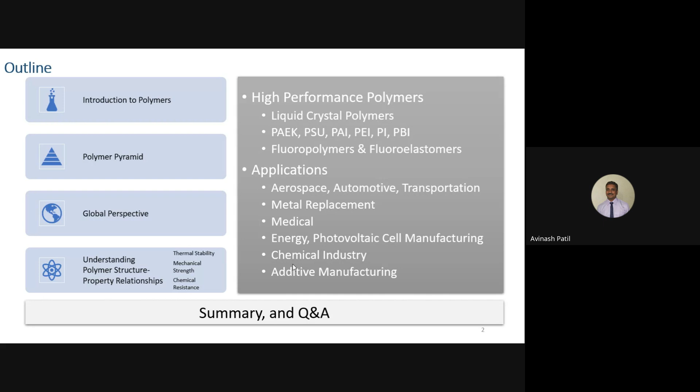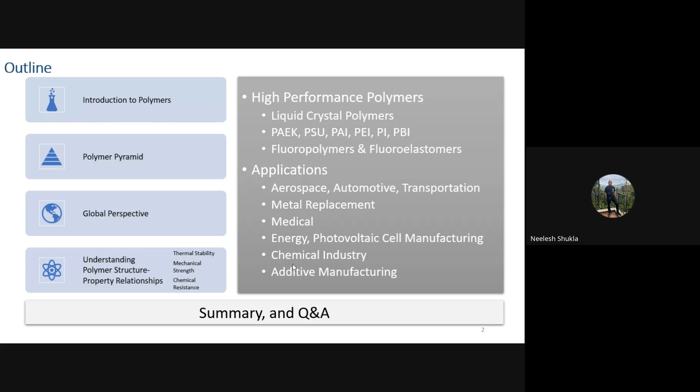I don't think anyone is there who has not heard the word polymer. Obviously, the kind of developments that have taken place in the field of polymers, or what we generally call plastics, make it impossible to live our lives without plastics. So we are all aware of that. We come across many polymers from morning to night, and we'll try to identify what high performance polymers are also there, which might not be very evident to us, but we do use them directly or indirectly. That's what we'll try to see throughout this presentation.

Coming to introducing polymers very briefly: the word polymer comes from the Greek words poly and meros, a combination of these two. Poly means many and meros means parts. That's how the word polymer has been made. It's also known as macromolecules, because these polymer molecules are very different from the regular chemicals or small molecules - these are much longer molecules.

Now, how are polymers made? In order to make a polymer you need something known as a monomer. A monomer is a smaller molecule, and a polymer is a much longer chain of these monomers linked together. So this is a polymer, and here you have got a monomer.

Now, one polymer that we all have used widely and seen everywhere is used to make polythene bags, the shampoo bottles we use in the bathroom, the toys with which our kids play, and even some of the safety equipment worn by people in the army in very dangerous situations. This polymer is polyethylene. It's one of the simplest polymers to start with - you start with a monomer named ethylene or ethene, and you polymerize it. Polymerization means joining together these small molecules in a chain, the way you'll make a garland using small flowers. That's the way polymerization is done.

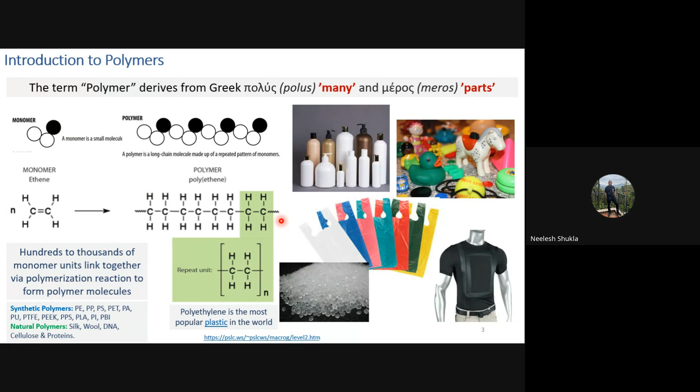So you can broadly categorize polymers as synthetic polymers or natural polymers based on the kind of origin they have, the roots they are made from. There are many more other ways also, but we'll just stick to this for the time being.

Now, I understand there's a different level of familiarity with polymers, so I've tried to capture some resources which would be useful even after today's session. Try to grasp what you can grasp today. But if you are a beginner and haven't gotten too much into polymers or chemistry so far, I would request you to visit the Macro Galleria site - its link is also provided below. This is a very fun way to learn about polymers, and they also have a separate section called Kids Macro Galleria, so even kids or people in school can try to learn about polymers in a fun way. So this is for beginners and those who are advanced learners.

A few books which I have found very interesting and informative throughout my career are listed here. One of the best books I came across was The Principles of Polymer Chemistry, by the 1974 Nobel Prize winner Dr. Paul J. Flory. Apart from that, there is one more about Principles of Polymerization by George Odian, and another one by Billmeyer, a textbook of polymer science. These are highly recommended books for anyone who wants to learn more about polymers.

With that bit of information, I would like to now introduce you to high performance polymers. Polymers have different properties, different characteristics, and the way they've been used in general, the kind of volumes and properties they have, has been used to categorize them. We talked about one categorization, natural and synthetic, based on the origin of the molecules. This other categorization is based on their performance, where you break polymers into 3 or 4 levels. Generally, earlier these used to be called commodity plastics, which are very basic polymers we use day to day: polyethylene, polypropylene, PVC, polystyrene. These are the materials.

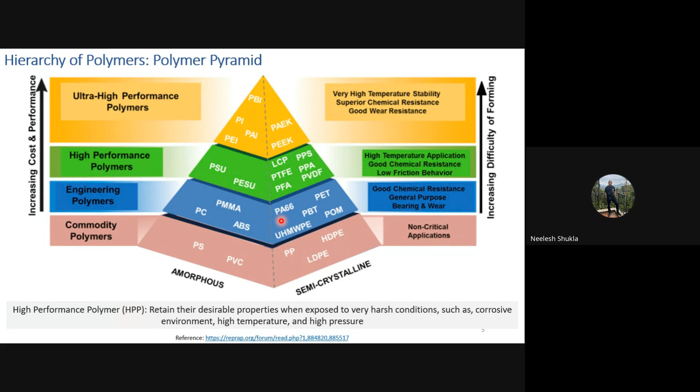Additionally, it's all about scale—the scale, as I mentioned, is less than 1% of the total, and that also pushes their cost up. So they are generally costlier compared to other materials. Roughly, to give you a ballpark number for the price, they would cost somewhere from $10 to $100 per kg. That's the economic part of the high performance polymers.

Now there are many manufacturers across the globe who make different kinds of high performance polymers—Saint Gobain, Solvay, Victrex, DuPont, Daikin, Sabic, BASF, even 3M, Celanese. These are some of the key manufacturers. The list is not limited to this; there are many more, but for your reference, some of them I have listed here.

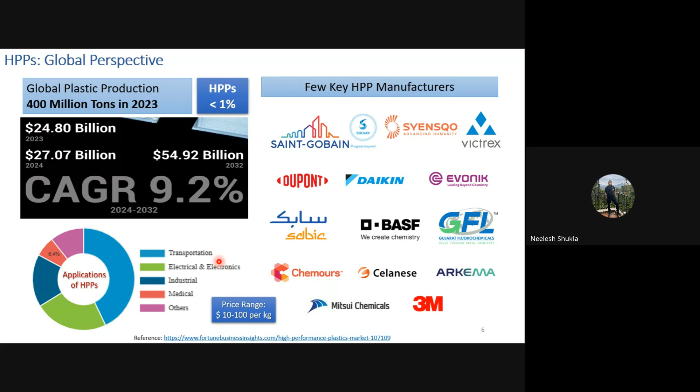Now, when you talk about high performance polymers, these are a few examples. For example, PEEK, which has very good strength and thermal stability, and these properties make it suitable for applications where you need strong mechanical properties and high temperatures.

Now, PSU, polysulfones, have got very good electrical insulation, very good mechanical strength, and they are very good in terms of their dimensional stability also. So for these properties, they go in the electronic industry.

Polyphenylene sulfide, PPS, this polymer has got very good purity and very good chemical resistance. Obviously, mechanical strength is also very high. So these characteristics make it very suitable for medical applications, and also electronic and automotive industry.

Another polymer, polyphenylene sulfone, which has very good impact strength and chemical resistance. So this polymer, based on this structure, can withstand steam sterilization, and that makes it a very suitable material for medical application.

We have polyetherimide, again having very good strength and good electrical insulation, and additionally good radiation and chemical resistance. So these things make it very suitable for electronic and aerospace applications.

We have a couple of fluoropolymers, PTFE and PVDF, and these polymers are very good. They will have very good chemical resistance. They will not have very high mechanical strength, but their chemical resistance is something that makes them very useful, and that's where they are widely used in the chemical industry.

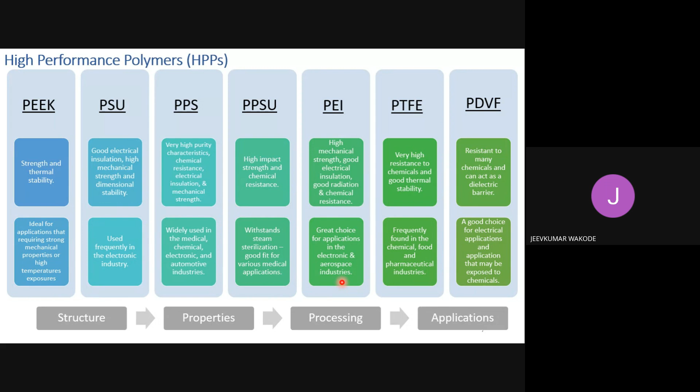So as you can see on this slide, I have put many polymers, their properties and their application. There's a link between the polymer and their properties. So the properties of any polymer would depend on what kind of chemical structure it has. That would be the basic chemical structure, what kind of chemical constituents are there, the monomers or the repeat units that the polymer has, which would determine to a large extent the properties of that particular polymer.

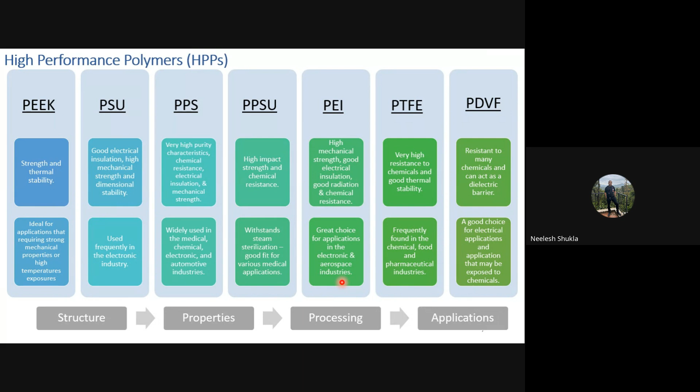And then subsequently, processing is required to convert this polymer from raw material to a shaped product form, and that would determine the application. So in order to be able to identify a suitable right material for any particular application, one needs to understand the relationship between the polymer structure and its properties. So that's what we'll do. We'll take a few cases here and try to understand that aspect before we move further.

As I mentioned in an earlier slide, these four aspects, the structure of the polymer, the properties of the polymer, their performance, and their processing are related. So you have to have all these, and one aspect that is missing is cost, the economics of the whole thing. These four, plus one factor, when they all come together and are coordinated, then you have a proper material converted from the raw material to a final product, which can be useful for society.

Now, if you talk about structure, as most of you should be aware about polymers, they are long chain molecules, but those long chains can be in very different ways. They can be linear, they can be branched, or they can be cross-linked. These chains can be very flexible, or they could be very rigid.

As I showed you one example, we had polyethylene coming from one monomer, ethylene. You can use more than one monomer and end up with copolymers, where you have used more than one monomer and they have copolymerized. Or you could use polymers in combination, which is also a property. You have polymer A with certain property, polymer B with certain property, you mix them in a suitable ratio, and you get a third material which has the properties of both. That's called polymer blending.

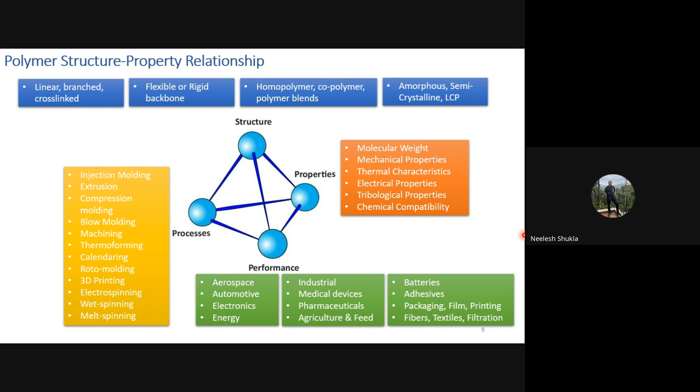So these are the performance characteristics which demand the selection of the right polymer. So this is the one aspect that is very critical, and let's look at a few examples of how the structure is going to affect the polymer property. So there's some phenomena, as you know, if you take water and cool it down, it will convert into ice, the solid phase. If you heat it further from room temperature to higher temperature, it will evaporate. So those are the thermal transitions that water undergoes as you change the temperature.

So polymers also undergo this kind of transitions, but polymers are more complicated than low molecular weight molecules such as water. So as I mentioned, the polymers have got very long chains, and these long chains can be present in various kinds of arrangements.

So if the polymer chains, which are very long, are arranged such that they fold onto each other and are neatly arranged in this packed form, they are known as crystalline. The polymer would be known as crystalline. On the other hand, if you have these chains going everywhere, randomly going in and out, you would have something known as amorphous.

But most of the polymers generally fall in the category of semi-crystalline. There are not many polymers, or very few, you can call them completely crystalline. Otherwise, most of them come as semi-crystalline, and there are elastomers and thermosets which would be called amorphous. So these two characteristics are there.

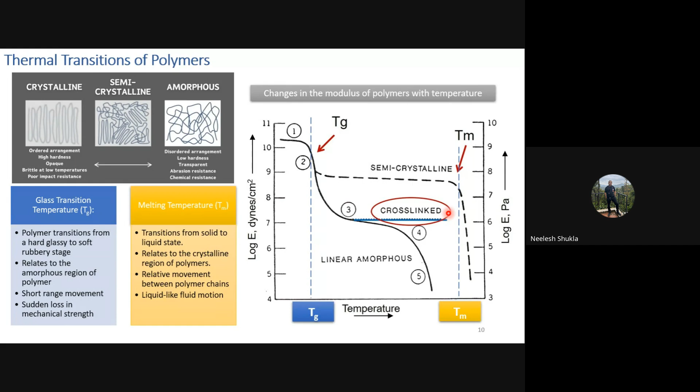As we saw, the properties depend on the temperature of the polymer, and there are transitions as you go from low temperature to high temperature, so they affect the performance of any polymer. You can look at this curve.

At what temperature this kind of degradation takes place depends on their structure again. Generally, polymers with a higher degree of crystallinity will degrade at a higher temperature.

Polymers whose repeat units have aromatic groups and halogens will again have better thermal stability. Obviously, polymers with cross-linking or secondary bonds like hydrogen bonding or van der Waals forces will also be more stable compared to other polymers. So these factors push the thermal stability of polymers to a higher level.

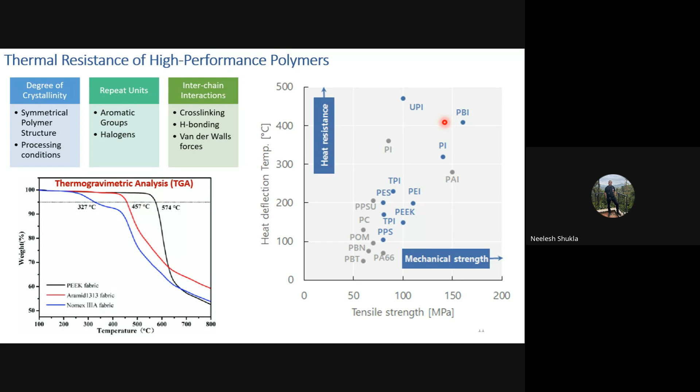On the graph on the right side, I've compared the mechanical strength and the heat deflection temperature. You can see all the polymers, based on their structure, will have very different strengths. High performance polymers like PBI and PI would have higher tensile strength and even higher heat deflection temperature, so they can be used at higher temperatures, because other polymers would lose their strength at those temperatures.

Talking further about the mechanical strength of polymers, it depends on one very critical factor, as I mentioned earlier: the molecular weight of the polymer. As you start taking small molecules and joining them together via polymerization into a longer chain, there's a certain threshold limit up to which the polymer would not have any useful mechanical strength. After you've linked a certain number of polymer chains, which varies from polymer to polymer, the material would start showing some tensile strength that can be of use.

But while the tensile strength is increasing, there's one more phenomenon also taking place: the melt viscosity of the polymer also keeps increasing with the increase in molecular weight or chain length. So the downside is, if you want very high performing, high strength polymers, you can keep adding more polymer chains, but your viscosity would increase, which has a counter effect in terms of processing — you would have to reach higher and higher temperatures.

Then there are some polymers where, although they are not thermosetting, their large molecular weight makes it very difficult for them to be melted and processed. One such polymer is ultra high molecular weight polyethylene. It's the brother-sister of polyethylene, the simplest polymer, but the number of polymer chains is many more compared to normal polyethylene, HDPE or LDPE.

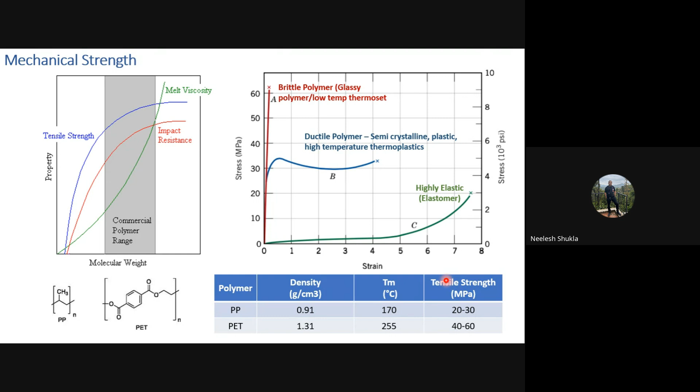If you look at the density of polypropylene, it is lower than that of PET. Its melting temperature is also lower, and its tensile properties are also lower. So that's what I've been trying to tell you - the way you play with the structure of a polymer affects its mechanical properties.

Now coming to another critical aspect that relates to the chemical resistance of polymers - their structure. When you want to use a polymer in contact with any environment where chemicals are present, there are certain factors which would affect its stability, whether it can be the right material or not, or whether it will work there or not. First of all, the polymer structure, as I mentioned earlier, and the type of chemical that you're going to use.

The concentration of chemical - whether you're using concentrated acids or alkaline material, or they are in low concentration - temperature: low, high, or sub-zero. How long the chemical is going to be in contact with the material, and during the application, whether there will be stresses on the material, because that will be additional burden on the polymer. These are the factors which would affect the performance of any polymer under the environment.

Now, generally, if you look at different kinds of high performance polymers, fluorinated materials which have got a carbon-fluorine bond - PTFE or Teflon, which we all know, is one such material. This carbon-fluorine bond is the strongest bond in organic chemistry. Additionally, fluorine is very highly electronegative, and as a result of these effects, the fluorine atoms which are around the carbon chain backbone kind of shield the carbon chain from attacks by these chemicals.

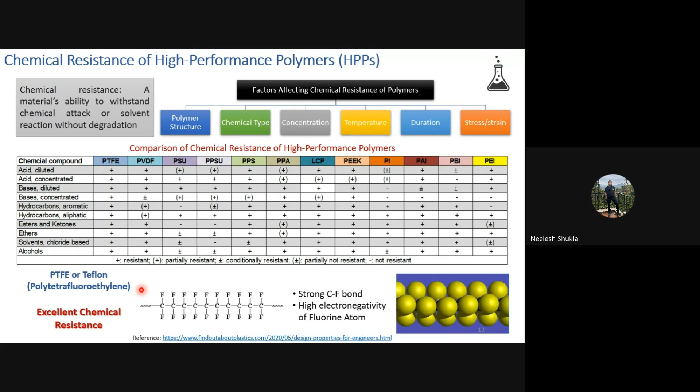So that's what I've been trying to do so far - tell you how the structure is important to determine the properties. Now we'll move towards the next part of this presentation, where we'll look at some high performance polymers and their applications. Here we'll not go through the kind of outline laid down earlier; we'll be moving fluidly from the polymers to applications and vice versa.

So let me introduce you to one of the very high performing polymers - the family of polymers known as PAEK, polyaryl ether ketones. How are these polymers made? You have monomers which will have three different functionalities in them: you will have aryl, basically benzene kind of rings; you will have a flexible ether group; and you will have a ketone group also, which would give you some dipolar interactions between the polymer chains.

So these three aspects are used to synthesize polymers. If you consider this PAEK family, you will have more than around 340 known polymers available. How are those polymers made? They are made by changing the order of these groups, using different numbers, changing the order, and changing the kind of materials from which these groups can be added to the polymer. We'll not go into all 340 of them today, we'll just look at three different materials.

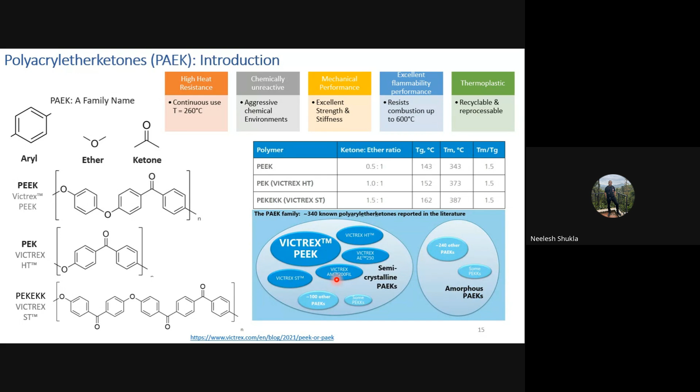So the PAEK family, as I mentioned, has more than 340 known polymers available in literature. Only a few of them have been commercialized and found to be of useful application, and most of them are semi-crystalline which have been used; very few are amorphous.

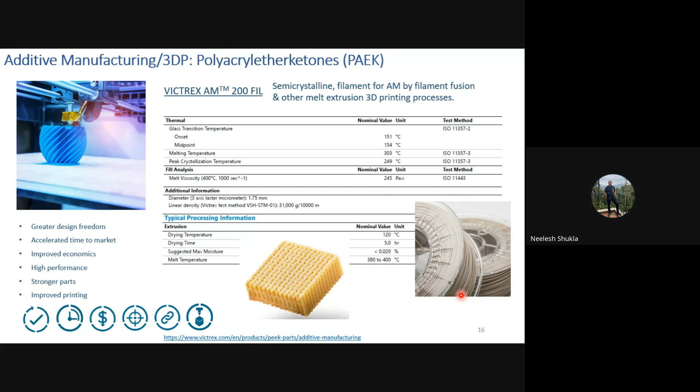Now, looking at how we use this particular high performance polymer—this PAEK family of polymers is used for one special application everyone talks about these days, that is additive manufacturing or 3D printing. It allows great freedom and a very short time from lab to market. It's more useful when you have a high cost, high value part, but not in very large volume, so that's where you can improve the economics of your production processes.

PEEK, being a high performance polymer, is a better option than trying materials like polyamide and PLA, which are typically used for 3D printing applications. By using this high performance polymer, one gets stronger parts, and this also has some improved printing characteristics over the other materials.

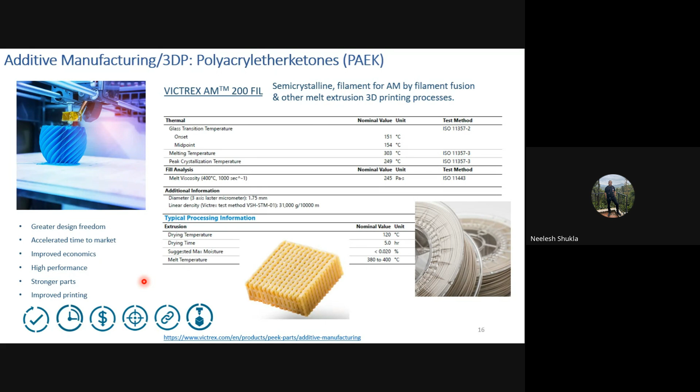The kind of process you set up would depend on its melting temperature and so on. It will require high temperature because PEEK melts at around 303 degrees Celsius, so you will have to use about that temperature, and the equipment has to be equipped for that. But you will be able to print very complicated parts which are very good in terms of mechanical strength, and they have very good chemical resistance as well. So that's one critical example where poly aryl ether ketones are used.

The second polymer is sulfone polymers, also known as polyaryl sulfones. The aryl part means there is going to be a benzene ring somewhere in the polymer chain, and sulfone means an SO2 group will also be present.

You can vary the structure by introducing ether linkages to make ether sulfones, or remove them and have more rings. That's how you keep varying the structure of the polymer, and similarly they will have impact on the properties.

Polysulfones are different from PAEK, which was a semi-crystalline polymer, in that sulfones are amorphous polymers, so they have transparency which makes them very suitable for various applications. Being a high performance polymer, they also have good strength and electrical properties.

This is a very good polymer when it comes to resistance to strong disinfectants. Many cleaning agents and disinfectants are used in the medical industry, and being resistant to them makes it a suitable candidate for that application. It can be used at temperatures as high as 180 degrees Celsius, and it has very high hydrolysis resistance, making it suitable for repeated steam sterilization, a good choice for pharmaceutical or medical applications.

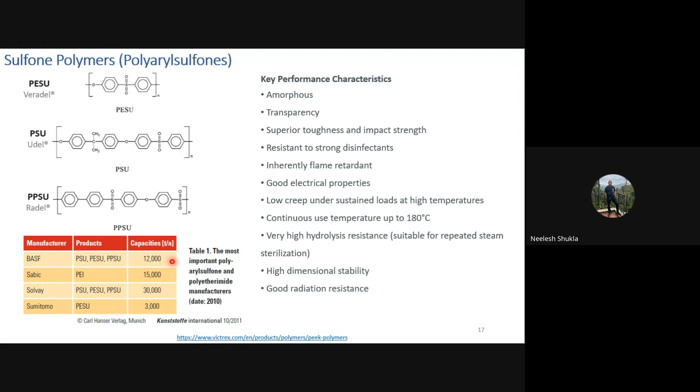Some companies making these materials are BASF, Sabic, Solvay, and Sumitomo. As I mentioned earlier, their capacities are not very high. Although this is very old data, I don't think it would have changed by orders of magnitude—it would have at most doubled or stayed in the same range.

For applications, polysulfones are used in the automotive industry, where being amorphous polymers with transparency, they're used to make housings for headlamps, because older halogen headlamps can heat up to very high temperatures, 180 to 200 degrees Celsius. These housings, with their dimensional stability, good resistance to moisture, and low coefficient of thermal expansion, offer a good solution for headlamp reflector housings.

Apart from automotive engineering, you can find them in your bathrooms and kitchens. Coffee machines often have a function to add hot steam, and some components get washed in the dishwasher. That's where hydrolysis resistance is very important, along with resistance to high temperatures and detergents.

You also need materials that can be used in food contact applications. These properties make it a very good material for some parts of coffee machines. Similarly, being a food grade material with the ability to be sterilized at high temperatures makes it very good for baby bottles.

Looking at the electronics and electrical industry, many circuit breakers have latches made from this material because these components don't stress crack easily. They have very high impact strength and very good dimensional stability, making them suitable for many components used in the electrical and electronics industry.

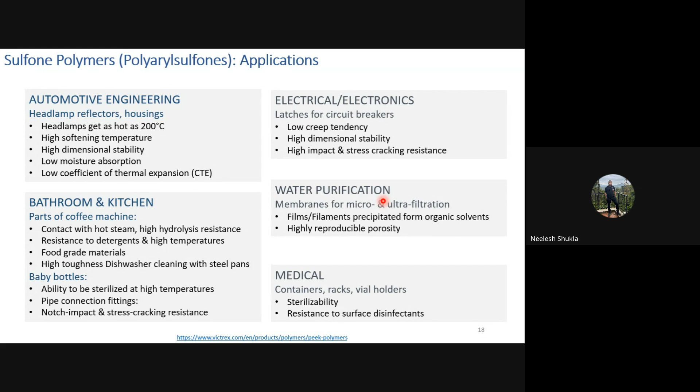A very relevant application is water purification, where polysulfone based membranes are used for micro and ultrafiltration, because these materials can be precipitated as filaments or films from solvents and have very highly reproducible porosity, making them suitable for water purification. We've already talked about medical applications due to their sterilizability and resistance to disinfectants.

So we've talked about two polymers, PAEK and polysulfones. The first polymer was semi-crystalline, the second was amorphous. Now we look at a different kind of polymer: liquid crystal polymers.

Liquid crystal polymers have polymer chains which are very stiff, and the beauty is that if you look at a normal semi-crystalline polymer, it will have an ordered chain arrangement in its solid state, and once you take it above its melting temperature, the chains lose their order and become irregular shaped.

Think of it like a Maggi packet: this is the Maggi cake that you take out of the packet, and this is the one that is ready after the cooking has been done.

On the other hand, LCPs are very different—they have order in their solid state before their melting temperature, and even after melting, they maintain their order.

So that's the unique property that they have, and that makes them suitable material for many applications. It gives them high strength, and they can even be used to replace metallic components in certain applications.

One application I have tried to capture here comes from a company named Zeus. They make catheters for vascular applications, and these catheters have to be MRI compatible. If you use metals such as SS, you cannot match that compatibility.

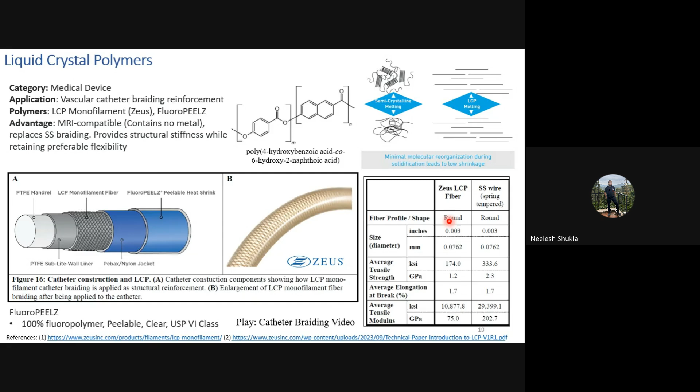Another two very important materials are aromatic polyamides. You know polyamides like nylons - any polyamide would have an amide group, that is C double bond O NH. Conventional nylons like nylon 6 or nylon 66 have linear chains attached to this functional group. On the other hand, aromatic polyamides, as the name suggests, have aromatic rings attached to this functional group, and there are two main kinds of aramides.

Both are very high specialty fibers: Kevlar and Nomex. They are from DuPont, so DuPont makes them. The para aramid is Kevlar and the meta aramid is Nomex. Both of them have got very good heat resistance, and this comes from their interchain bonds and the presence of the benzene rings in them.

Kevlar is something that you must have heard about. It is used for protection against ballistics and cut/puncture resistance. Basically, you can make a bulletproof vest using Kevlar.

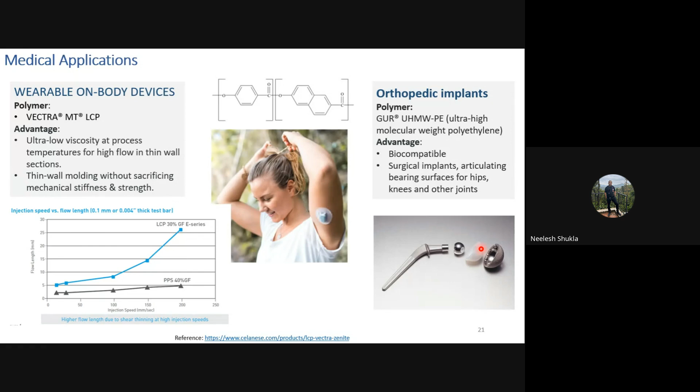So the next category of high performance polymers is fluoropolymers. These are polymers which have the presence of fluorine. A wide range of materials are made by choosing different kinds of fluorine attached to different kinds of backbone. The most common and highest volume, most important fluoropolymer among all is PTFE, polytetrafluoroethylene, known by the name Teflon.

It has good dimensional stability, though its creep rate is very high, but it gives you very good thermal properties. You can use it from -180 degrees Celsius to as high as 260 degrees Celsius. It has good chemical resistance and electrical properties also.

Then you have other polymers as well, like FEP. In this case, you have fluorinated ethylene and propylene, where hydrogen has been replaced by fluorine on the ethylene and propylene molecule, and they have been polymerized. This kind of change affects its thermal stability to some extent. Its range of higher temperature comes down, but it becomes more useful in terms of being able to be processed. This becomes a more thermoplastic material compared to PTFE, so you can mold it into suitable products very easily.

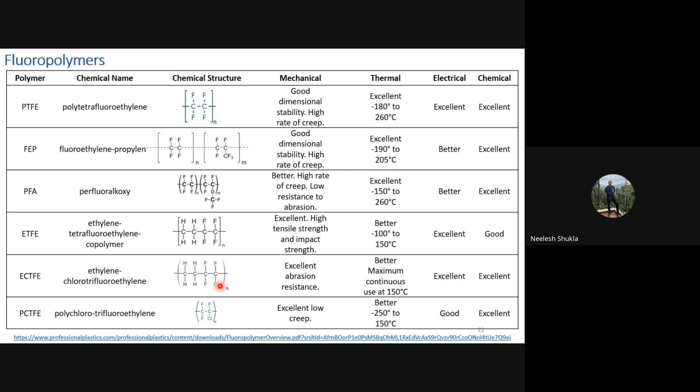Similarly, you have many other materials: PFA, ETFE, ECTFE, PCTFE. In all of these, the key element remains the same: the presence of fluorine bonded to carbon, which gives it very good chemical resistance, electrical properties, and thermal stability.

Now if you look at the properties of these materials, because that's what is required to find a suitable material, the way you change the chemical structure would have an impact on the properties. These polymers generally are not used for mechanical strength. Compared to other high performance polymers, fluoropolymers have much lower tensile strength, but they have one good property: higher elongation, and they offer chemical resistance and thermal stability.

PTFE has the highest melting temperature. Once you start replacing this or combining it with some other monomer, you lose some of that thermal stability, and you can see the melting temperatures going down further. That also adds value, because other materials can then be processed by methods where you can melt the material and shape them.

On the other hand, this is something that cannot be done with PTFE. You cannot melt process PTFE. You have to take PTFE powder, fuse them, put them in a cold compression molding, apply pressure onto them, and then subsequently put them in a furnace to fuse them together. So that's a longer process compared to the other processes by which you can make other polymers into useful products.

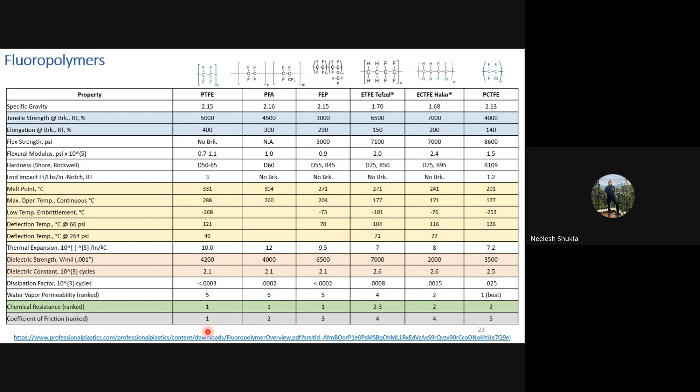PTFE is one of the materials which has the lowest coefficient of friction, and that makes it very suitable for many tribological applications.

Now, coming to the applications, they are used in the chemical industry to make many sealing kind of applications because of their chemical resistance and temperature properties. Good insulation properties make them a good material for insulation of wires and cables for the electrical and electronic industry. Then in the automotive industry, they offer very good resistance to oils and many chemicals, so they are used as sealing material.

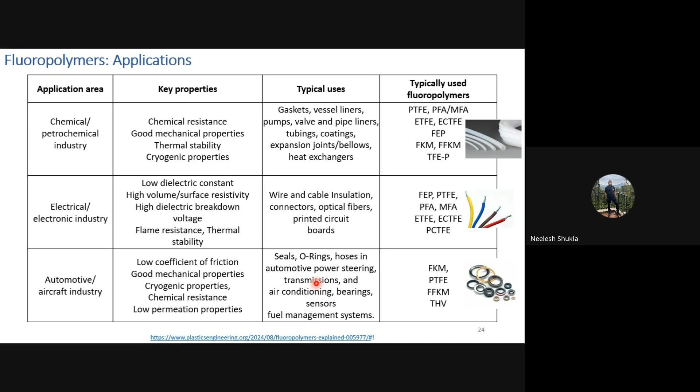One application of coating: all of us must have used or come across a Teflon coated pan at home. That Teflon is nothing else but a fluoropolymer known as PTFE. This polymer, apart from being chemically resistant and highly thermally stable, also has the property that it does not let anything stick to it. That's why you can use very little oil and still cook delicious dishes using such a pan. Beyond this, fluoropolymers find wide applications in the medical field.

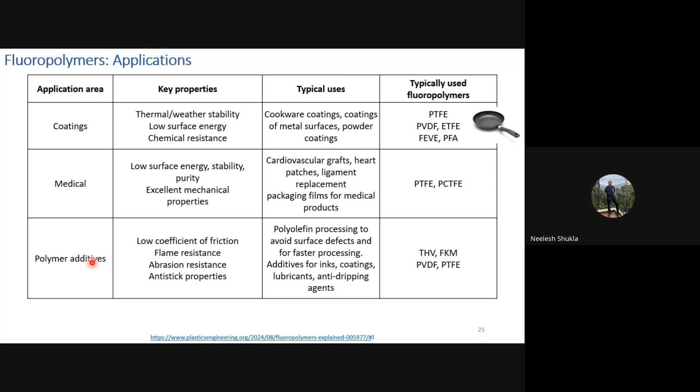They are used as polymer additives because they have a low coefficient of friction. You add some of that as an additive to other polymers, nylons, PEEKs, and many more, to reduce their coefficient of friction. Finally, they also go into the semiconductor industry because a lot of times you use very nasty kinds of chemicals there. The same applies for energy conversion and storage kind of devices, where they offer electrical properties combined with chemical resistance, making them a good material of choice. You also use them in normal kinds of applications.

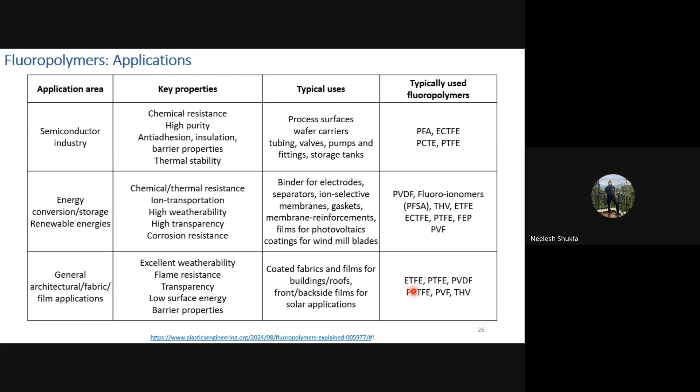So many times, even in the textile industry, in order to make fabrics stain repellent, some kind of coating is done onto them, which can involve fluoropolymers. So these are the key applications of polymers. Again, we understand the properties and then we link them to the application.

FKM and FFKM both come from DuPont, and the difference between them is that one has a fully fluorinated chain. FKM has a partially fluorinated polymer chain, and FFKM has a fully fluorinated chain, and that gives them their properties. The one with higher fluorine content has better thermal stability and chemical resistance than the other, but it also makes it costlier. So if you look at the prices of conventional fluoropolymers, fluoroelastomers, and then perfluoroelastomers, the cost increases significantly.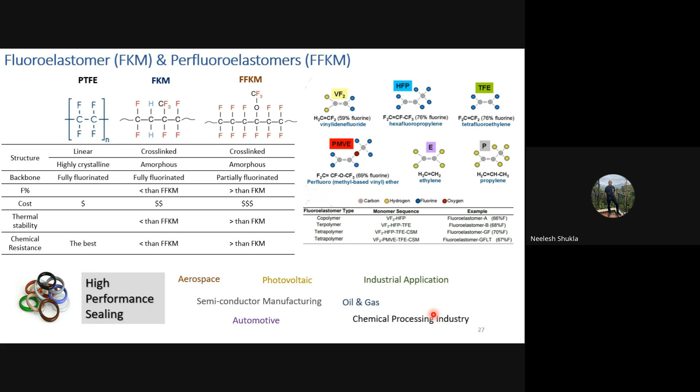Because of these properties, they are used for very high performance sealing, and these seals are used in the fields of aerospace, photovoltaic applications, industrial applications, oil and gas, semiconductor manufacturing, automotive, and chemical process industries. This is a special case study where the application of these special seals has been shown in the field of photovoltaic cell manufacturing.

And this is a long process. The three aspects of this process: wherever we need to use very harsh chemicals, wet chemistry, with HF, HNO3, etc., and alkaline bases also; or you have very high temperatures, where you need seals with very good compression set and sealing force retention; or you have a plasma coming in contact with your sealing material. So these three different application areas were chosen from the photovoltaic cell manufacturing process, and different kinds of seals were compared.

In the first application, wherever harsh chemicals are present, FKM and FFKM were compared. In this case, FFKM performed better. Again, we know why: this material has a higher fluorine content, which gives it better chemical stability. So there was not much change in the volumetric swelling of this material compared to FKM.

The second application is weight loss upon plasma erosion. Once materials are exposed to plasma, there is an impact on their properties, and there will be weight loss. But that is observed very little in the case of the fluoroelastomer FFKM, as compared to fluorosilicones and silicones.

The last application concerns high temperature and comparing the sealing force retention. There, the perfluoroelastomer FFKM performs much better than the other sealing materials. So that's how you break down the application into what kind of environment and requirements it has, and based on that you select a particular polymer.

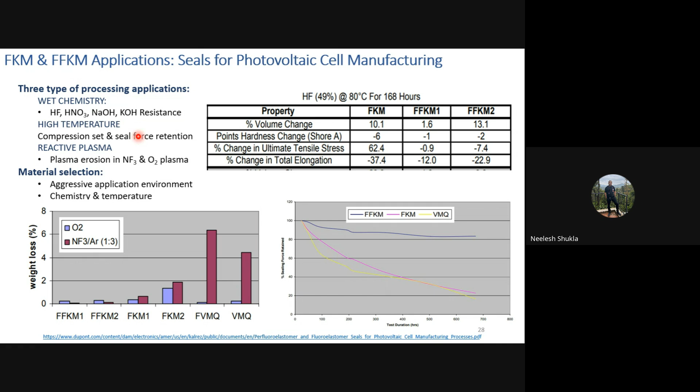But these are highly performing elastomers or rubbers, you could call them. And wherever the stakes are very high, that's where you don't worry about the cost, and you choose these kinds of materials.

Coming to the next polymer, polyetherimide. It's also a thermoplastic, amorphous thermoplastic similar to polysulfones, and it is sold by the name of Ultem, which is from SABIC. Now by now you understand easily that polyetherimide has an ether group and imide groups. That's how we call it polyetherimide.

It has very good thermal resistance, and its TG is very high, 217 degrees Celsius. So if you remember what we discussed earlier, mechanical properties start dropping once you cross TG. So you can expect this material will retain its strength and stiffness up to 200 degrees Celsius.

It also has very broad chemical resistance, dimensional stability, and is inherently flame retardant. In many cases, if you look at nylons, polyesters, and low commodity HDPE, PP, those polymers are not inherently flame retardant. To make them flame retardant you have to add additives, compounding them with the right material to get flame retardancy values. But some high performance polymers don't require anything else - they are already inherently flame retardant.

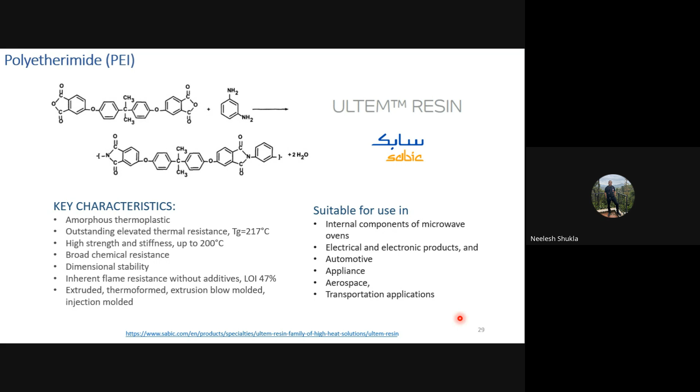Being a thermoplastic, you can use all the methods used to mold it by melting and then solidifying. Being a high heat resistant polymer, it's used for internal components of microwave ovens, because temperatures there can go as high as 200 to 250 degrees Celsius. It's also used for electronic applications, automotives, aerospace, and transportation applications. I have again provided links here, so you can visit the sites to know more about these polymers and their applications, and since most are from the respective manufacturers, they have enough data available to answer any query.

Another specialty polymer is polyamide-imide, sold by the name of Torlon PAI by Syensqo. Syensqo was formerly Solvay. Here you've got an amide group and an imide group - these two groups make it polyamide-imide. This is as the information is provided by Syensqo.

It is one of the highest performing melt processable thermoplastic polymers, and it is also an amorphous polymer. It has exceptional resistance to wear, creep, and chemicals, and can perform up to 260 degrees Celsius temperature. It has very good electrical and structural characteristics. It maintains performance at high temperature because its heat stability is higher, and it has very good dimensional stability and very low coefficient of friction and linear thermal expansion.

As a result of these properties, further modifications are done on the base polymer. You add the right kind of reinforcing agent to it, and you can increase the strength further - that's where high strength grades have been developed. They perform just like metals at elevated temperature, and you can use them to make precision components for load bearing operations. These high strength grades have glass fibers and carbon fibers filled in them.

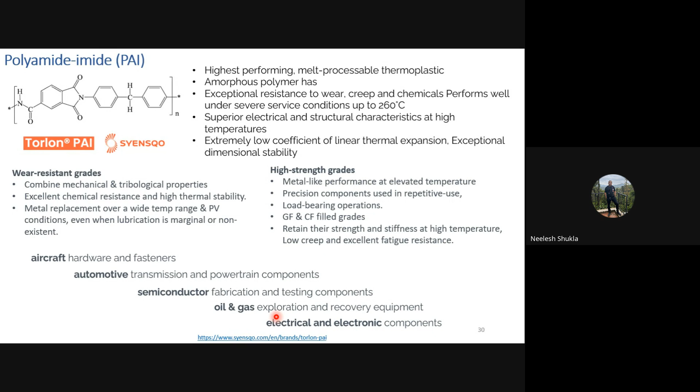Let's go to a slightly simpler specialty polymer as compared to the earlier ones, polyimide. This time we don't have to worry about two groups, only imide functional groups are there. But this is again a very special polymer because it works at a much higher temperature than any other polymer, even higher than PTFE. If you look at the temperature range provided, it can go from minus 196 degrees Celsius, that is cryogenic conditions, to very high temperatures of 288 degrees Celsius, and for short duration you can go as high as 482 degrees Celsius.

On top of that, you can combine it with suitable reinforcing agents, and the temperature range goes further. The polyimide is sold by many manufacturers - I have listed two of them here. One is Mitsui, whose products are branded Aurum, and DuPont has polyimide available in two different forms. One is in the form of parts and shapes, where you have rods, plates, and so on available, which you can machine into the kind of product you want to use. They also have films for some other applications.

Now, I have highlighted two key applications of polyimide.

Polyimide is a very costly material and is not used to replace other materials very often. But where pressures are very high and you need a wide range of high temperature tolerance, that's where they are used as seats for ball valves, because they have very high creep resistance and good wear properties. That's one industrial application area where polyimide is used widely.

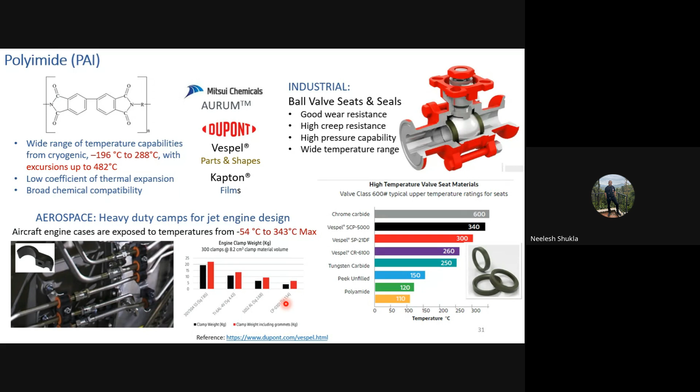One example is aircraft engines, where temperatures can go from as low as minus 54 degrees Celsius to 343 degrees Celsius, and that's where you have to use these fasteners or clamps. There's also a lot of vibration, and not every polymer works well along with vibration as well as extreme temperatures. That's where polyimides have been used, and they've been found beneficial replacing stainless steel and aluminum with polyimide-based clamps. So this is one niche application of polyimide.

Coming to the last polymer, that is polybenzimidazole, called one of the world's highest performing polymers, and there are reasons for it. First of all, it's a very unique and niche kind of material. There's only one company, as per their own website, PBI - that's the only commercial manufacturer of PBI-based fibers and other products. It's polybenzimidazole - you've got benzene and imidazole kind of structure there.

This material is available in the form of powder, solution, compound, film and fiber from PBI. We can take pride that our own Gharda Chemicals from India has also developed their own product form of polybenzimidazole. They call it ABPBI.

The difference is that PBI, the way they make Celazole, uses two different monomers with different functionalities. If you look at monomer 1, it has two carboxylic acid groups, and the other one has two amines - this is A type monomer and this is B type monomer. On the other hand, what Gharda Chemicals have done uniquely is club these together in one molecule - you have amines and you have carboxylic acid, so A and B type functional groups are available on the same molecule, which can be polymerized to get the final polymer, ABPBI.

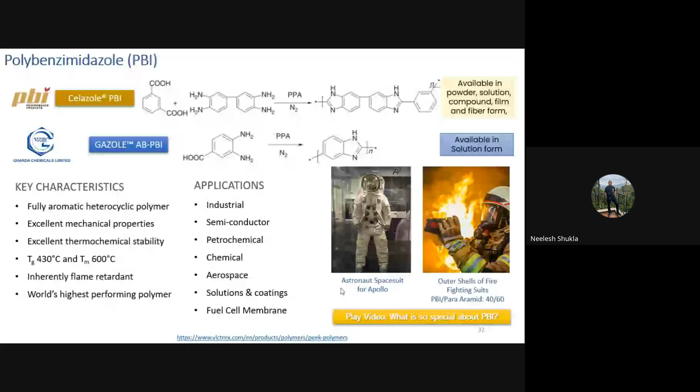So that was the video I wanted to show you about PBI, how it is used, and that was the last slide. Now I move to summarizing my session.

Overall, what I wanted to convey in this presentation was that high performance polymers are not produced in very large volumes, and they are not very cheap. They are very high cost polymers, but they are the go-to material if you have any extremely demanding conditions such as extreme temperature or exposure to harsh chemicals.

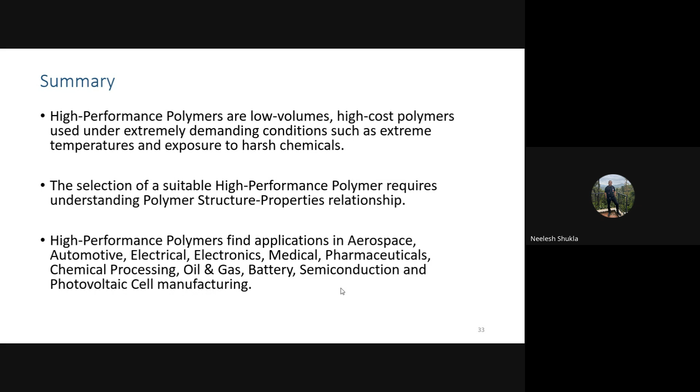So that was overall what I wanted to share with you about high performance polymers. It's a very vast area, and it was very difficult to cover. It could have been broken down by either looking at one polymer and all the applications where it goes, or looking at one application area and going through all the polymers. But I wanted to give you a flavor of different polymers, their capabilities, and different areas also. So that's the way I had structured it.

Hope you found it useful to some extent. Links are provided, I hope you will get access to this presentation, and do visit those links to know wherever you have any doubts about any of these applications or polymers.